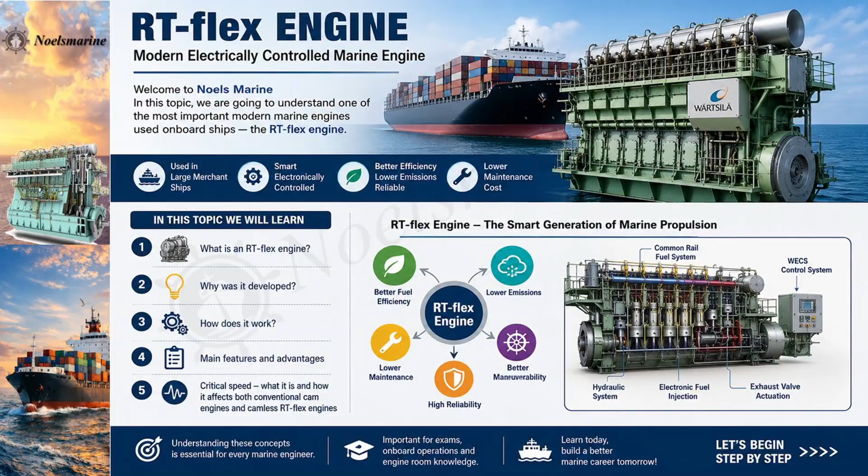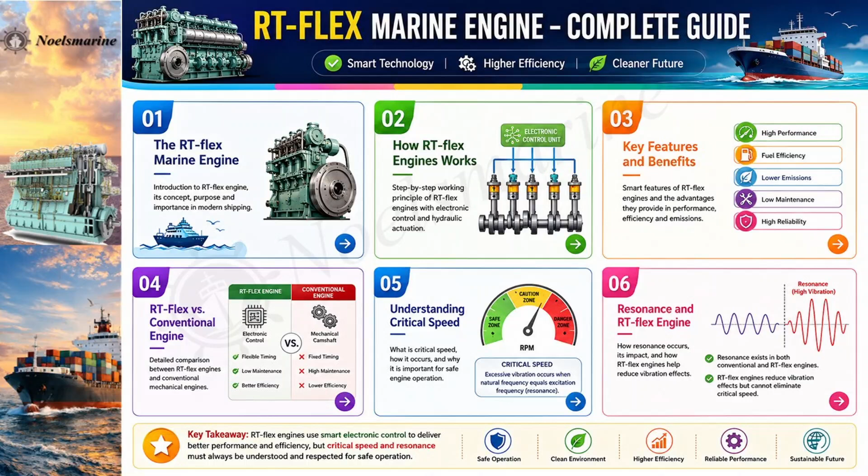Today, we're going to go deep right into understanding RT-Flex marine engines and critical speed operations. We've got a great agenda: the marine engine problem, the RT-Flex engine, how electronic control works, the smart engine advantages, understanding critical speed, and the barred speed range. We'll learn what an RT-Flex engine actually is, why it was developed, how it works, and its main features. Plus we'll dive into critical speed and how it affects both conventional cam engines and camless RT-Flex engines. Let's jump right in.

Section 1, the marine engine problem. To really get why engineers developed the RT-Flex engine, we first have to understand the limitations of traditional marine engines. In traditional engines, fuel injection timing was fixed mechanically. This led to big issues, like poor combustion during low engine loads, higher fuel consumption, increased smoke emissions, and constant wear and tear on the camshaft components.

So to overcome all of this, the RT-Flex engine was born. There were three main reasons for this shift. First, fuel efficiency. Ships consume massive quantities of fuel every day, so even a tiny reduction in fuel consumption can save huge operating costs. The RT-Flex improves combustion and optimizes fuel injection, which brings fuel consumption right down.

The second reason, emission reduction. Modern ships have to follow strict environmental regulations, and the RT-Flex helps cut down on nitrogen oxide emissions, smoke formation, and unburned fuel particles. Finally, the third reason was better low-speed operation. Conventional engines usually struggle at low RPMs, but RT-Flex engines can run super smoothly even at very low speeds.

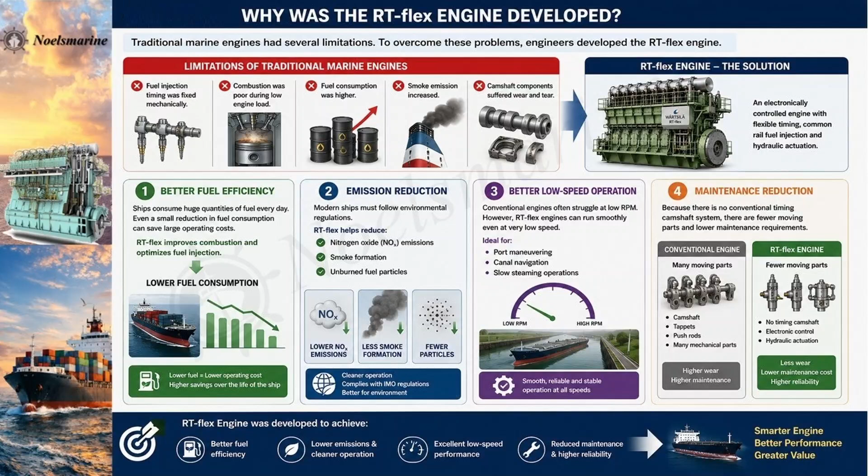Section 2, enter the RT-Flex engine. So what exactly is it? Well, an RT-Flex engine is an electronically controlled, low-speed, two-stroke marine diesel engine. It's mainly used in large merchant ships - container ships, bulk carriers, massive tankers, and other large cargo vessels. It's worth noting the RT-Flex engine was developed by Wärtsilä Sulzer.

Now here's where it gets interesting. Unlike conventional marine engines, the RT-Flex engine doesn't use a mechanical camshaft for fuel injection and exhaust valve timing. Instead, it uses three key things: first, an electronic control system called WECS, the electronic brain replacing the camshaft; second, a common rail fuel injection system; and third, a hydraulic servo oil system.

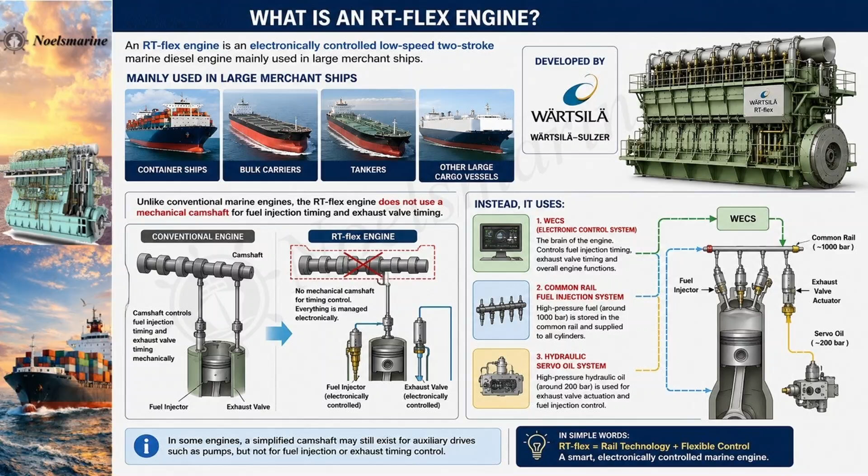Section 3, how electronic control works. Let's break down this working principle step by step. Step 1 is crank angle detection. A crank angle sensor detects the exact position of the piston and sends this signal to the engine's computer, called WECS, which stands for Wärtsilä Engine Control System. It literally acts as the brain of the engine.

Step 2, computer decision-making. The WECS system takes that info and calculates the engine speed, the engine load, the exact fuel quantity required, the fuel injection timing, and the exhaust valve timing. The system constantly adjusts the operation to guarantee maximum efficiency.

Step 3 is getting that high-pressure fuel ready. Fuel is continuously available in the common rail system, and the pressure is intense - approximately 100 megapascals, or about 1,000 bar. This fuel can be heavy fuel oil or marine diesel oil. If it's heavy fuel oil, the temperature is generally maintained around 135 to 145 degrees Celsius to keep proper viscosity. Next is step 4, fuel injection.

The WECS system sends an electronic signal causing the injector to open hydraulically. Because of this, fuel enters the combustion chamber at the perfect timing and quantity. The result? Better atomization, better combustion, less smoke, and greatly improved engine efficiency. And finally, step 5, exhaust valve operation.

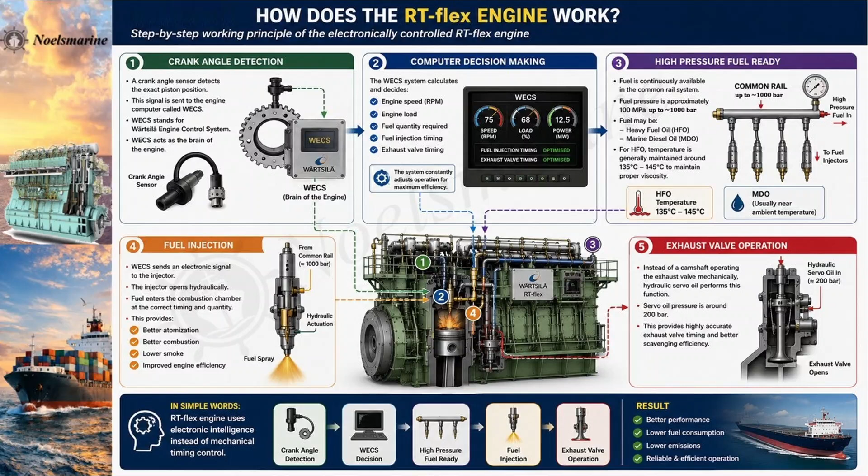Remember, there's no camshaft operating the exhaust valve mechanically here. Instead, hydraulic servo oil steps in to do the job. The servo oil pressure sits at around 200 bar, which provides highly accurate exhaust valve timing and much better scavenging efficiency. Section 4, the smart engine advantages.

Now, back in conventional marine engines, the camshaft mechanically controls fuel injection timing, exhaust valve timing, and starting air timing. The big disadvantage there is that the timing is fixed - your flexibility is literally zero. But in RT-Flex engines, electronic control handles all of these operations, meaning the timing actually changes based on the engine load, operating conditions, and power requirements.

Because of this flexibility, combustion improves, fuel efficiency increases, and emissions drop. An easy way to remember this? Just think of a conventional engine as a manual system with fixed timing, whereas the RT-Flex is like a highly

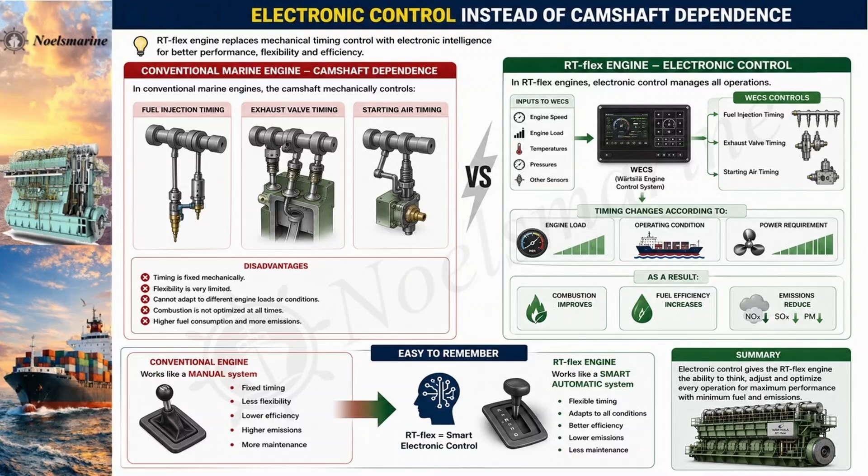responsive, smart automatic system with flexible electronic timing. Let's quickly recap its 5 main features. First is the common rail fuel system, keeping fuel at about 1,000 bar pressure, so all cylinders get fed from one high-pressure rail. Second is electronic fuel injection, where the computer completely controls the injection timing, quantity, and pattern, like

pilot, main, and post injection. Third, you've got hydraulic exhaust valve actuation, using hydraulic oil for precise timing. Fourth is that flexible low-speed operation we talked about, allowing smooth running at very low RPMs. And fifth, the total elimination of the conventional timing camshaft, which massively cuts down on wear and tear.

In actual ship operations, these features are a real game changer. Fuel consumption drops, meaning ships save huge amounts of money on long voyages. Maneuverability during berthing and unberthing gets so much better. Smoke emissions plummet, engine reliability goes way up, and maintenance costs just drop.

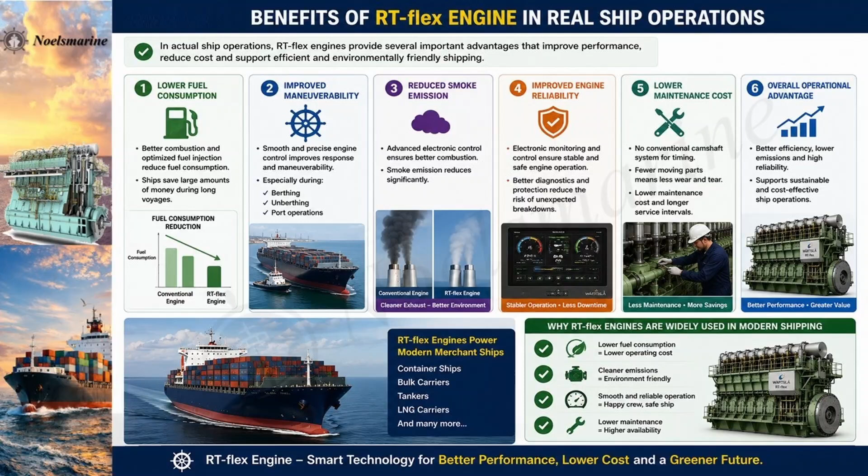Section 5. Understanding critical speed. Now, let's pivot and talk about a totally different but absolutely crucial concept: critical speed. So what exactly is critical speed? Well, to put it simply, it's the dangerous engine RPM where excessive vibration occurs due to resonance.

This dangerous vibration happens when the natural frequency of the shaft system perfectly matches the excitation frequency produced by the engine's firing forces. In plain English, the shaft vibrates way too much at a specific RPM, and this specific condition is what we call resonance.

It's kind of like pushing someone on a swing. If your push timing exactly matches the swing's natural movement, that swing is going to go higher and higher, right? It's the exact same concept here. Engine firing pulses can match the shaft's vibration frequency, and when they do, torsional vibration increases significantly.

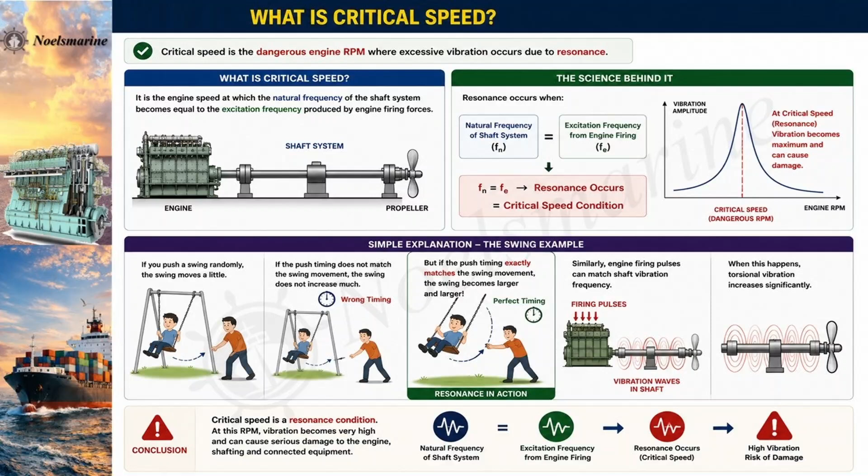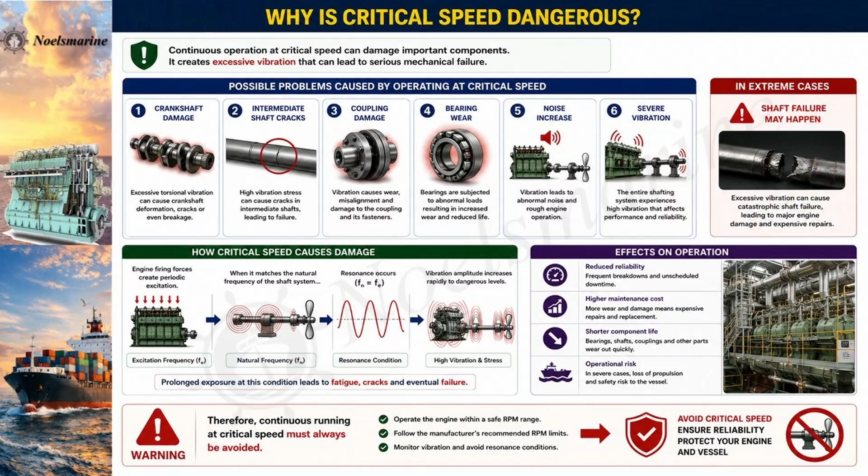Running continuously at this critical speed is incredibly dangerous for the engine. It can lead to severe crankshaft damage, cracks in the intermediate shaft, damaged couplings, excessive bearing wear, an intense noise increase, and just overall severe vibration. In worst-case scenarios, the entire shaft could fail. Because of this, continuous running at critical speed literally must be avoided at all costs.

Section 6. The barred speed range. To help prevent these disasters, engine manufacturers define a restricted RPM zone known as the barred speed range. They usually make this range slightly wider than the exact theoretical critical speed, just to give operators a safe buffer. For example, this restricted zone might be between 48 and 52 RPM.

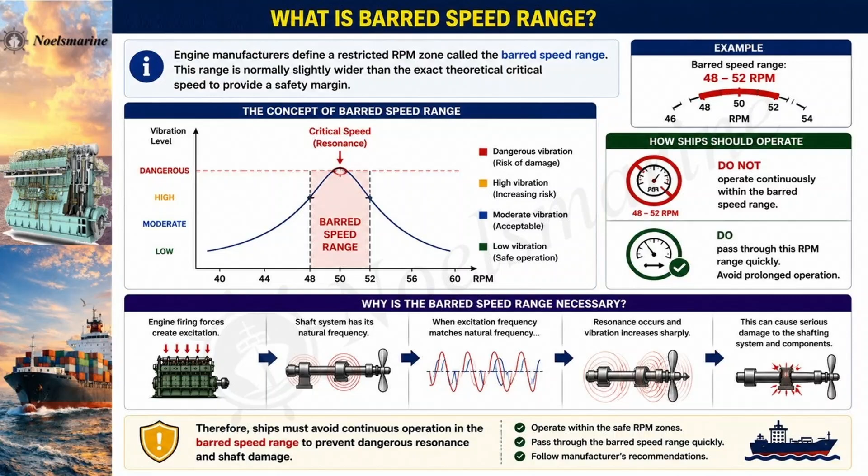Ships must never operate continuously within this range. Instead, the engine needs to pass through these RPMs very quickly. Accelerating quickly through this zone helps prevent that dangerous resonance and protects the shaft from damage.

Now, you might be wondering, does critical speed even exist in these advanced camless RT-Flex engines? The answer is yes, absolutely. Critical speed exists in both conventional camshaft engines and camless RT-Flex engines. Why? Because critical speed depends mainly on physical factors, things like the shaft's natural frequency, shaft stiffness, mass distribution, engine firing order, and propeller interaction. It doesn't actually matter if the engine has a camshaft or not.

Now, it is true that RT-Flex engines control combustion more smoothly because of their flexible fuel injection timing, better cylinder balancing, and smoother torque distribution. That means the vibration effects can be reduced, but critical speed cannot be completely eliminated. That barred speed range must always be respected.

So remember this key takeaway. Even though RT-Flex engines provide much smoother combustion, they can't eliminate critical speed because it's a fundamental physical characteristic of the shaft system and resonance.

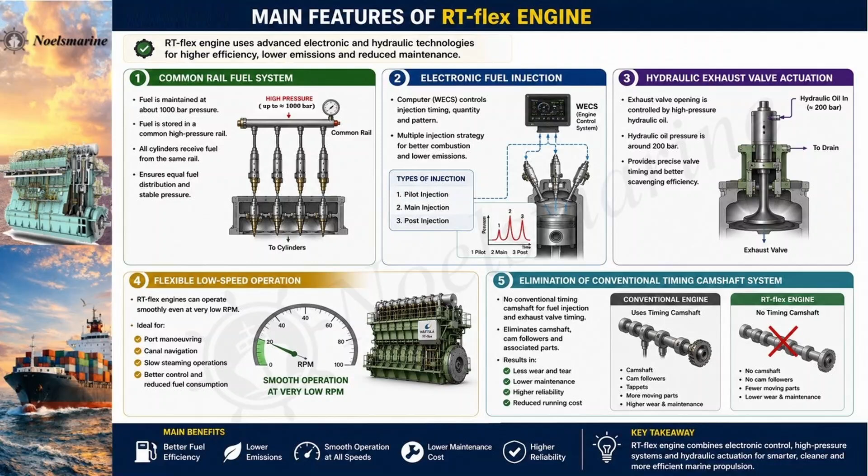So let's wrap this all up. The RT-Flex is a highly advanced, smart, electronically controlled marine engine. It swaps out the conventional camshaft timing for a common rail fuel injection and hydraulic control system. This gives you better fuel efficiency, lower emissions, incredibly smooth low-speed operation, and reduced maintenance. But at the same time, as a marine engineer, you absolutely must understand critical speed to avoid catastrophic shaft vibration.